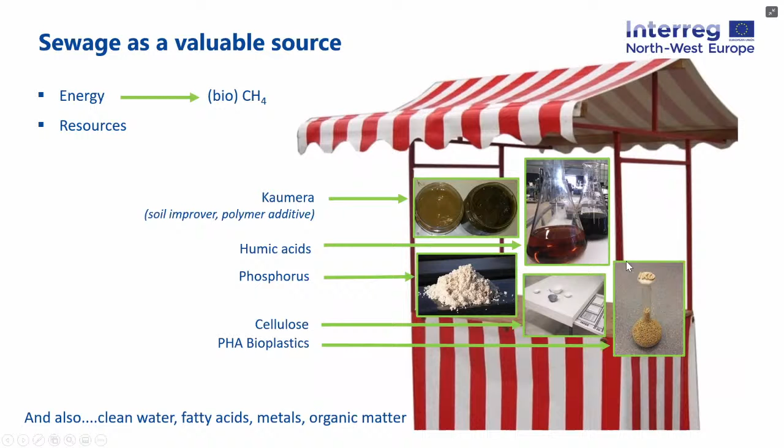Unfortunately, up to now, sewage is not fully utilized yet. I guess at this moment it's about less than 1% of the raw materials from sewage that is reused. And there are many different reasons for that.

First of all, I guess the potential is unknown by the markets. Secondly, it's also definitely still a challenge to extract all the raw materials in sewage. And thirdly, what we often see is that sewage has an image of dirty and unsafe, whereas we would like to see it as an opportunity.

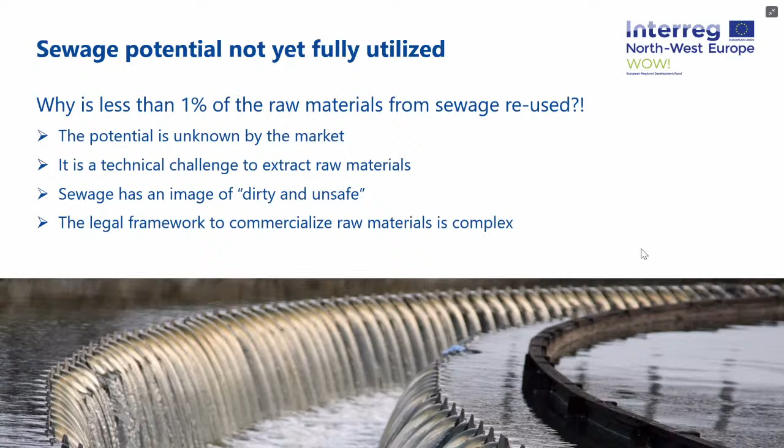And finally, something that also prevents us from reusing sewage to its full potential is the legal framework to commercialize raw materials, which is quite complex at the moment in the EU. So this is why we started the WOW project about 1.5 to 2 years ago.

And when you look at the WOW goals, we want to aim to start a transition towards a circular approach in sewage treatment. And for this purpose, we focus on 3 different things. First of all, we want to show that it's technically possible to recover raw materials from sewage water.

Secondly, we want to create a European framework for the steps that need to be followed from waste to raw material, so help out the legislation. And finally, we want to let market parties become acquainted with the potential of raw materials from sewage water, so it will get a boost.

Well, when we look at the end products that we would like to have at the end, which is in 2022, the first thing we aim for is 5 value chains from our bioproducts from sewage, and I'll tell you a bit more about that in a few minutes.

Secondly, we have 3 pilots for the production of 5 different types of raw material. Thirdly, a supporting tool to help water authorities in their choices towards a circular approach, and I will tell you more about that decision support tool in the last presentation of this seminar. And finally, a European legal roadmap.

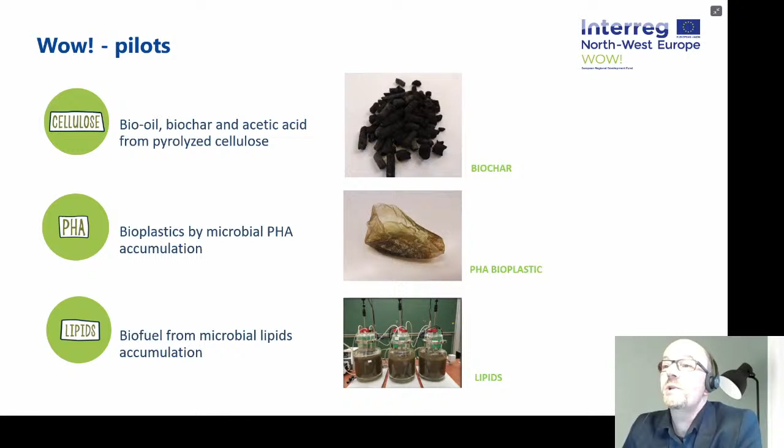To tell you a bit more about the three WOW pilots, the first one is cellulose, and we try to turn cellulose, which is toilet paper in sewage water, into bio-oil, biochar, and acetic acid via pyrolysis. The second is PHA, a bioplastic produced by microbial PHA accumulation, which the second presentation will go deeper into. Finally, we have lipids, from which we can produce biofuel via microbial lipid accumulation.

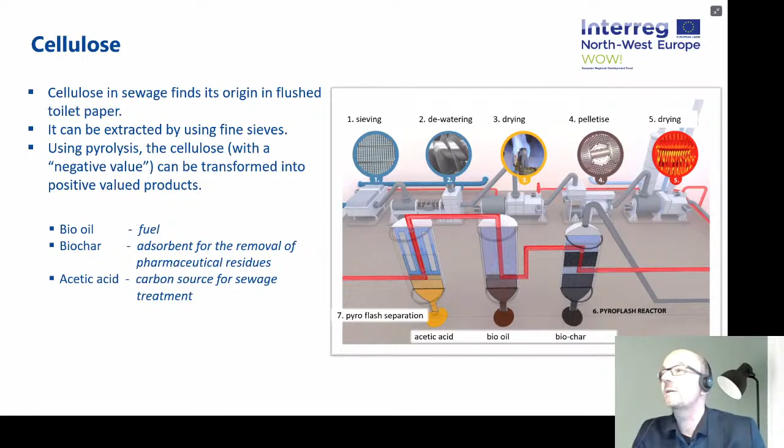Secondly, we have PHA, a type of bioplastic. It's the abbreviation of polyhydroxyalkanoates, a fully biodegradable plastic—actually the fastest degrading bioplastic you can find. Bacteria present in the secondary sludge of a sewage treatment plant can produce PHA, using volatile fatty acids already present in sewage. In WOW, we try to create proper conditions to enhance this PHA production, so more PHA is produced, allowing us to transform the VFAs present in sewage into positive valued products like PHA.

Finally, about lipids: bulking and foaming is a common problem in municipal sewage treatment plants, often caused by Microthrix parvicella, known to be responsible for this foaming and bulking. But you can also use this Microthrix to accumulate long chain fatty acids, also present in sewage as lipids, and these lipids can be harvested for biodiesel production. So we use the long chain fatty acids in sewage to transform them into a positive valued product, bio-oil.

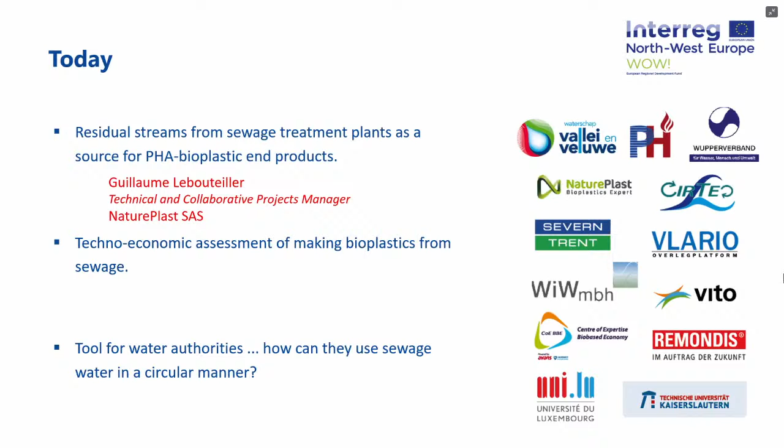Yeah, I hope everyone can hear me well. I'll try to share my screen now. Do you see me or not?

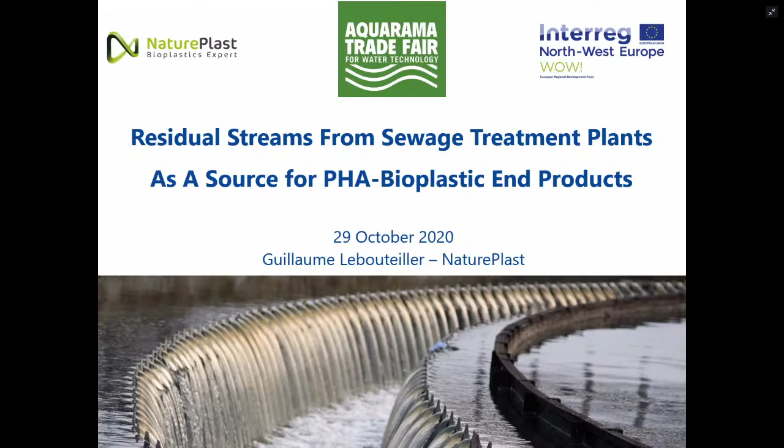Thank you, Jaap, for the introduction. My name is Guillaume Lebouteiller. I'm the technical manager of NaturePlast company. We are a French company located in Normandy, and we have been working for 13 years now on bioplastics materials. We are specialized in bioplastics research and development and compounding.

Today we will make a short presentation regarding the way to produce PHA bioplastics from sewage, which is what we are exploring within this very interesting project. First of all, I will present what are bioplastics and what are PHA.

Bioplastics is a whole family of polymers that can be bio-based and/or biodegradable. PHA are one material of the bioplastics family. PHA stands for polyhydroxyalkanoate, a polyester which can be obtained from two main monomers called 3HB for hydroxybutyrate and 3HV for hydroxyvalerate. One of the main products in the market right now is a copolymer called PHBV.

The proportion of each monomer determines the composition and properties of the material. It can be soft to rigid, very elastic, or very resistant to temperature. This is a very interesting bioplastic, especially because it is fully bio-based, obtained from renewable resources, and biodegradable in almost every condition. It's one of the only biodegradable polymers fully biodegradable in water, which is very important for some of the applications we are currently developing.

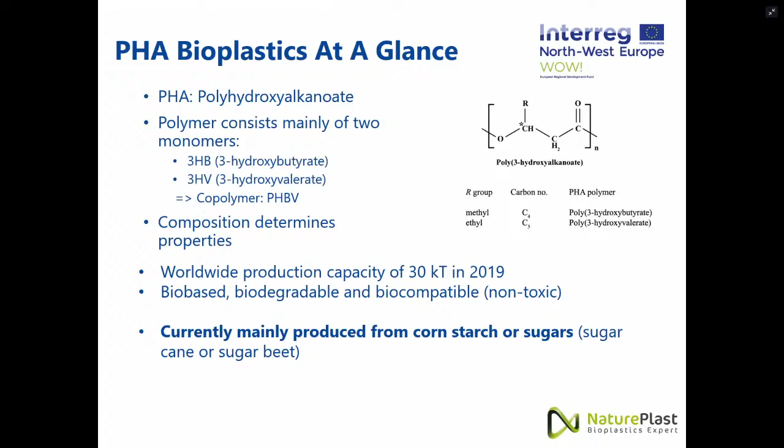Currently, PHA are mainly produced from standard biomass such as cornstarch or sugars obtained from sugarcane or sugar beet. The standard PHA production process uses volatile fatty acids (VFA), such as acetic or propionic acid, coming from sugars or starch, which are transformed by a mixed microbial culture (MMC) through a fermentation process, from which you obtain a mix of PHA and residual bacteria. Then you have to extract the PHA and purify it.

What we are trying to do in the WOW project, as already said by Jaap in his previous presentation, is to use sewage, for instance primary sludge, from which we can obtain VFAs through acidification. Then we obtain bacteria from activated sludge for biomass enrichment, and then do biomass PHA accumulation to get PHA-enriched biomass.

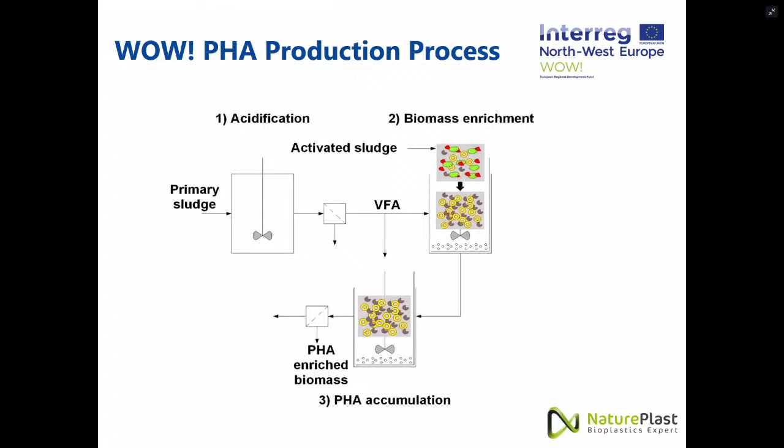Within the WOW project, we have a PHA pilot team with Kaiserslautern University and Wupperverband in Germany, working on pilot scale bacterial PHA production. The extraction and lab scale fermentation is performed by Avans. After obtaining the PHA, Natureplast, our company, does extrusion, injection, and characterization of the material to get the products. Vito, the last partner, performs the techno-economic analysis that you will see in the next presentation.

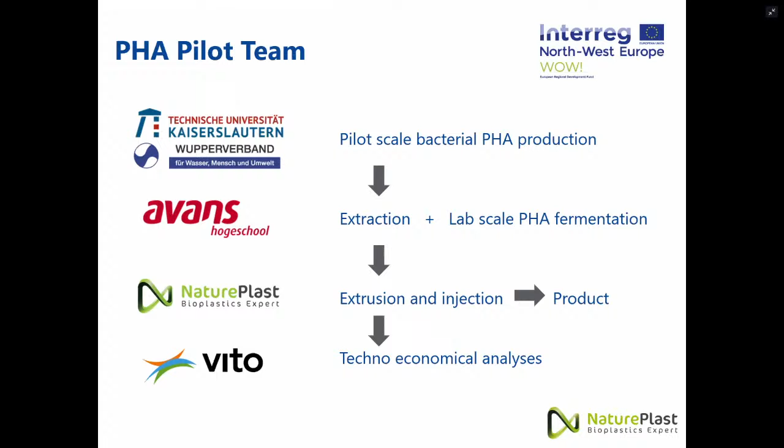Here are some examples of the pilot currently under development within this project. The first step at Kaiserslautern University is pilot scale PHA accumulation, with acidification reactors using primary sludge, which are then pressed to get the VFAs. The VFAs are then enriched, and the fermentation process occurs, allowing PHA to accumulate, which is then pressed and dried to get a PHA-enriched biomass.

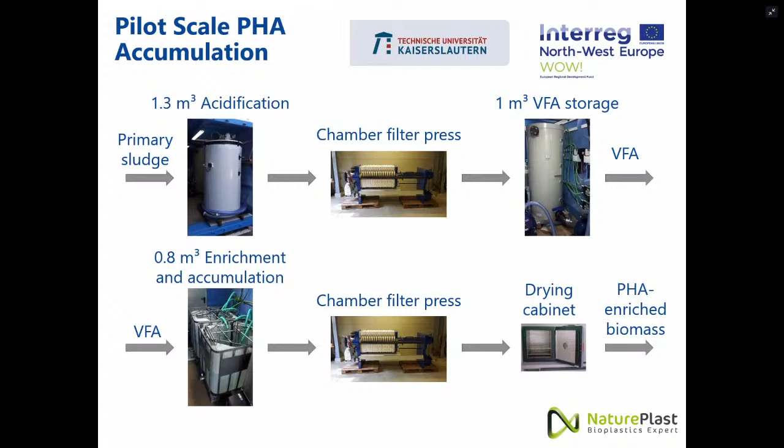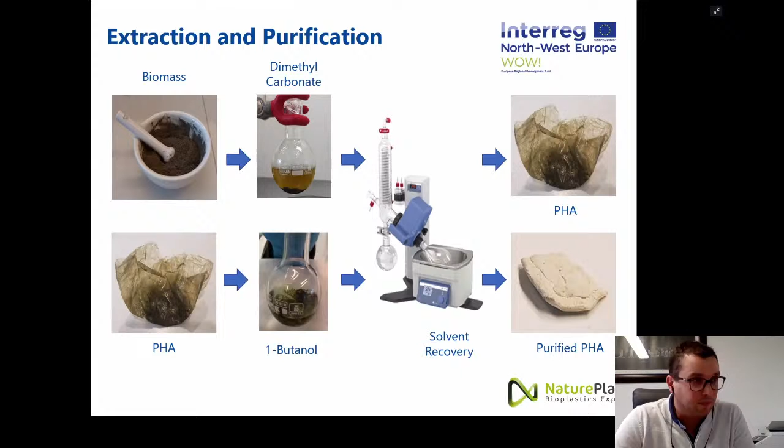All these steps are contained in this container, with all the equipment inside. Then you have the extraction and purification of the biomass, from which we extract the PHA with a solvent called dimethyl carbonate. You recover the solvent and get the PHA. The PHA is then purified with butanol; once again you recover the solvent and get purified PHA.

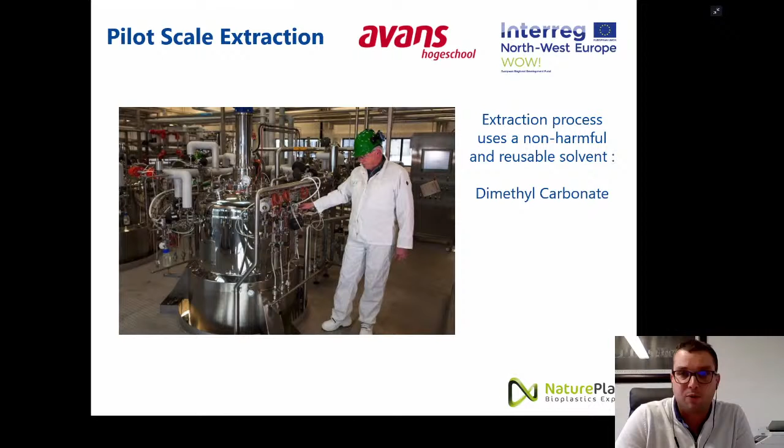Here you can see the kind of equipment used for the pilot scale extraction. What is very important and interesting in this process is the use of a non-harmful and reusable solvent called dimethyl carbonate. After this stage, once we get PHA, this is where we come in.

We use PHA through an extrusion process with 21mm twin screw extruders, standard equipment in the plastic industry, in order to get PHA compounds with improved properties. PHA obtained after fermentation, extraction, and purification is often very sensitive to thermal exposure, and it has to be compounded to improve its shelf life, its processability, and its properties in use.

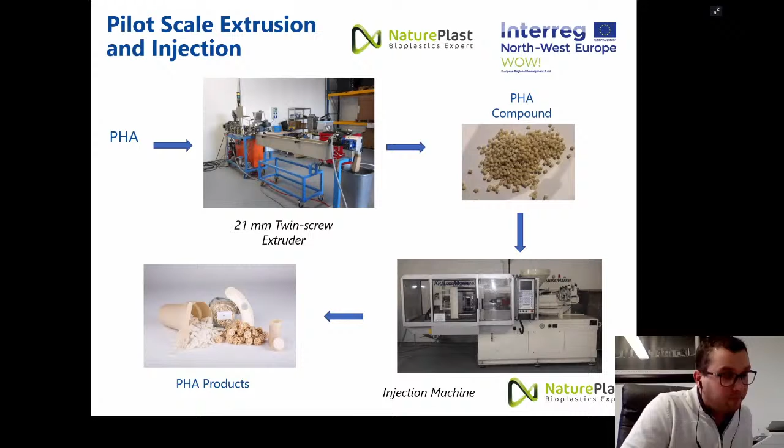Here we obtain a compound, a mix of PHA with additives and other biopolyesters, depending on what we want to obtain at the end, which are then injected in an injection machine, also standard plastic equipment, to get PHA products that you can see in this picture. So what can we do with PHA? This is where we want to go at the end of the project.

You can also make cosmetic packaging. It's a very interesting material because one of the functionalities used here is its ability to biodegrade really fast compared to most other biodegradable bioplastics. It's more and more used for applications where you are looking for degradation of the product after its use.

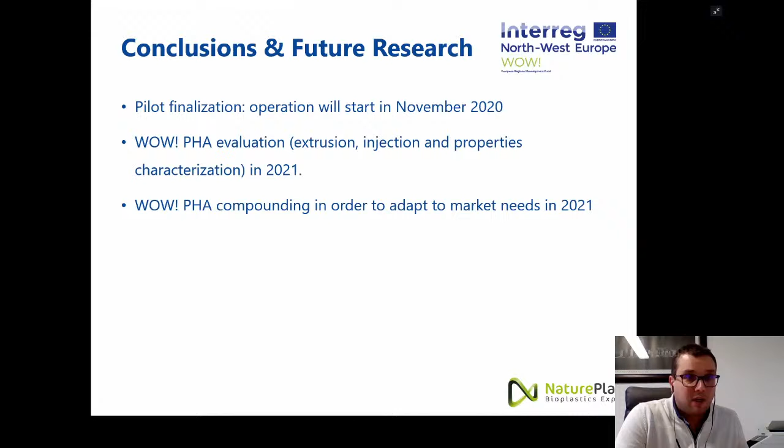We have created a small video about all three pilot installations. Let's have a look at it, and discover these three pilots.

Did you know that even used toilet paper can get a second life? Like this bench I'm sitting on.

Recently, the European Commission launched a new circular action plan to make Europe cleaner and more competitive. And although encouraging progress has been made, there's still a lot of work to be done to reduce our emissions and stop the ever-increasing amount of waste we are producing. Sewage is a largely untapped and endless resource for the circular economy.

In the WOW project, we embrace the circular use of raw materials from sewage. Our aim is to motivate sewage treatment plant operators and markets for bio-based products to meet each other. We are doing this by starting up three different pilot projects: one to recover and pyrolyze cellulose, one for lipids production, and one for making PHA bioplastics. We are currently at the sewage treatment plant in Ede, where our cellulose pilot is under construction.

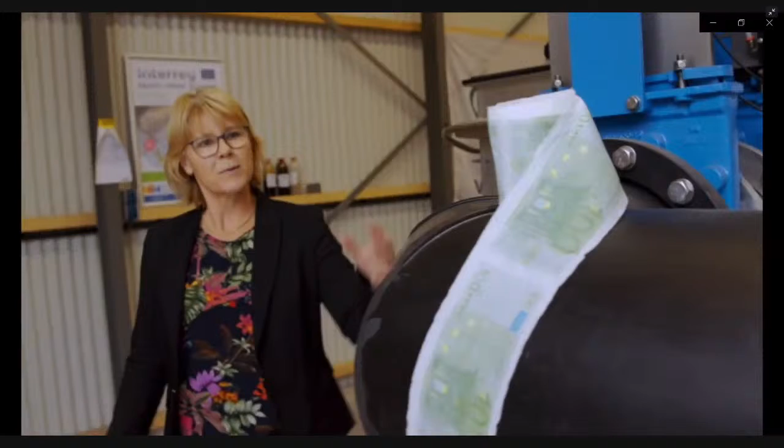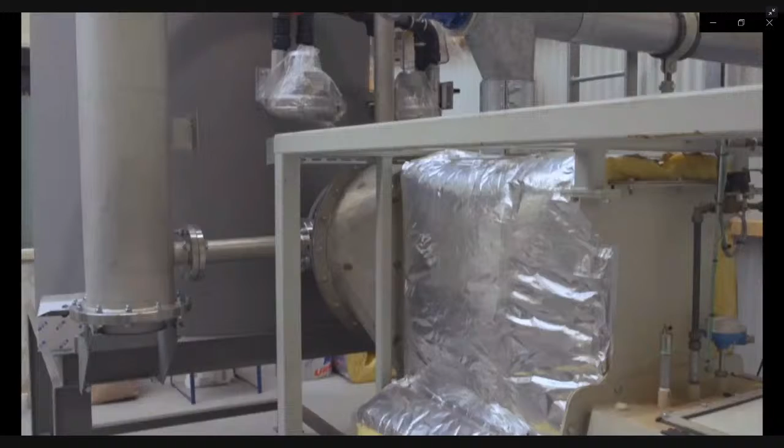In North-West Europe, each person flushes away about 13 kilograms of toilet paper per year. With fine sieves, we remove this toilet paper with cellulose in it. We dewater, we dry, and we press it into pellets. After that, we pyrolyze it. During this process, products like bio-oil and biochar are formed, and the biochar can be used to remove micropollutants from sewage.

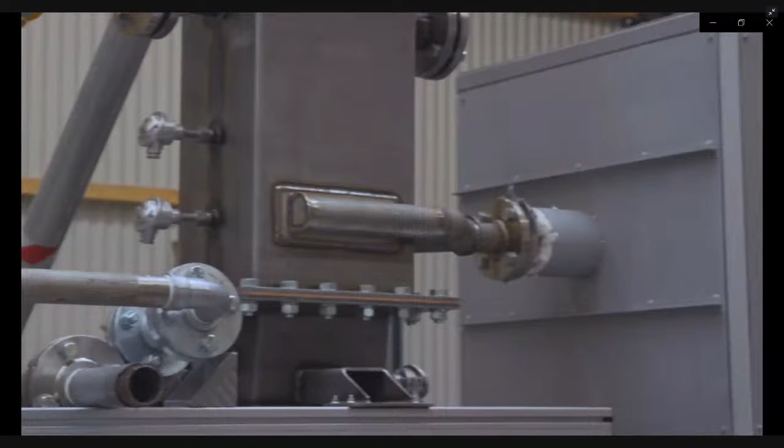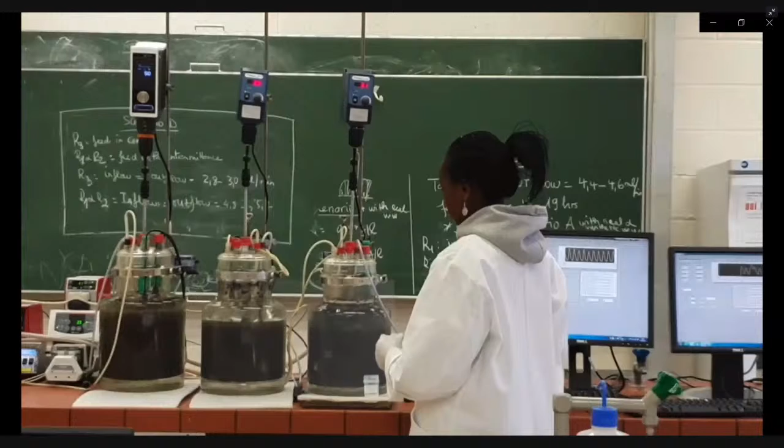Lipids are often seen as a problem in sewage treatment plants. In combination with certain bacteria, they can cause bulking and foaming. However, accumulating lipids can also be a great ingredient for biodiesel. Our project partner from Luxembourg calculated that lipids from sewage can cover a significant amount of the biodiesel market in North-West Europe.

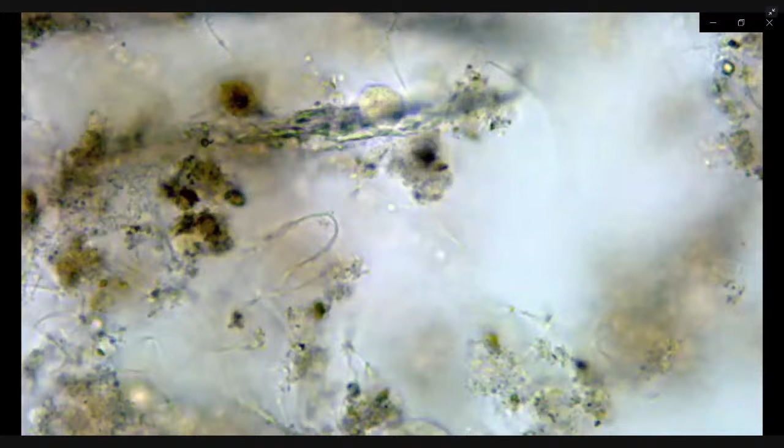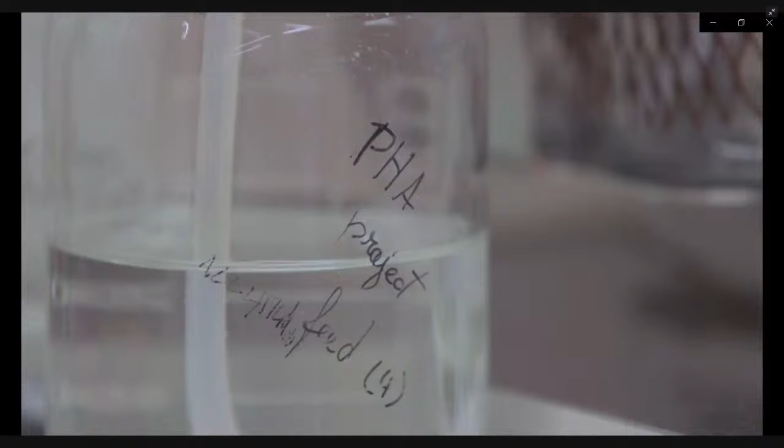Apart from the cellulose and lipids pilots, we also have the PHA bioplastic pilot. In this pilot, we work here in Breda along with our partners in Germany for the production and extraction of PHA bioplastic out of sludge or sewage water, and it works more or less like the human body. We aim to give bacteria volatile fatty acids, which is more or less like unhealthy food, and just like it makes us fat, for the bacteria it gives them PHA.

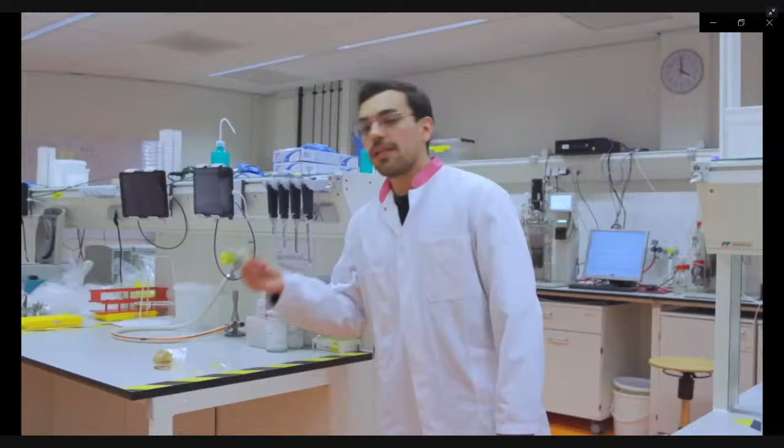After we make them fat, or make them accumulate this PHA intracellularly, we extract the PHA out of their cells, and then we can test for applications. With the extract, we can produce bioplastics like this one. Because they are fully biodegradable, they have the potential to substitute single-use plastics. Actually, PHA produced from sludge can already substitute 16% of all the PHA already produced worldwide. In our project, we show you the potential of raw materials from sewage. More companies are starting to get interested, and we hope so are you.

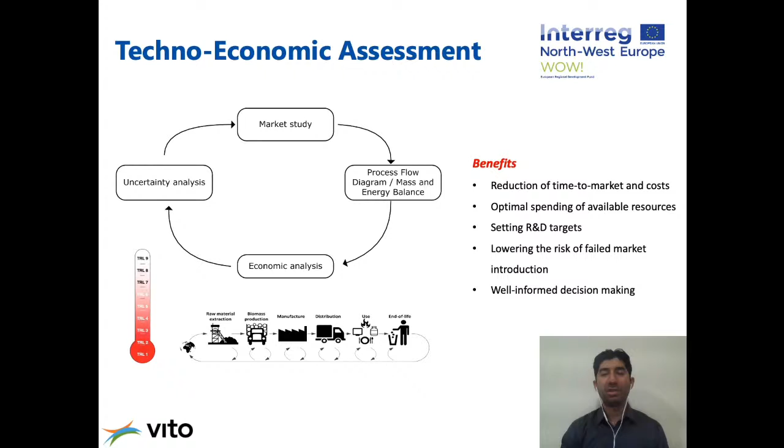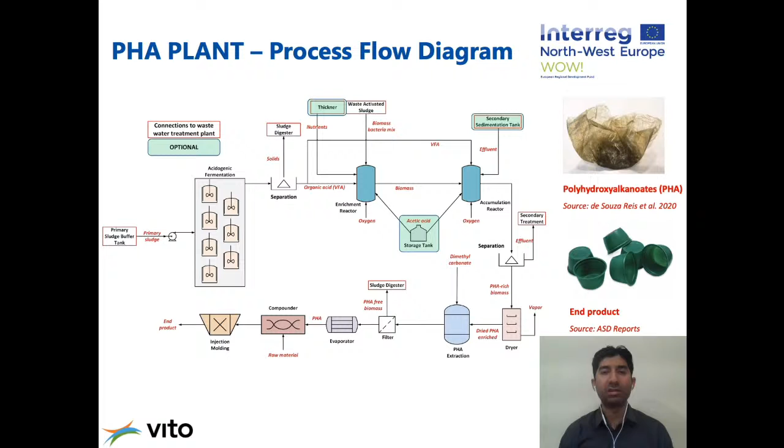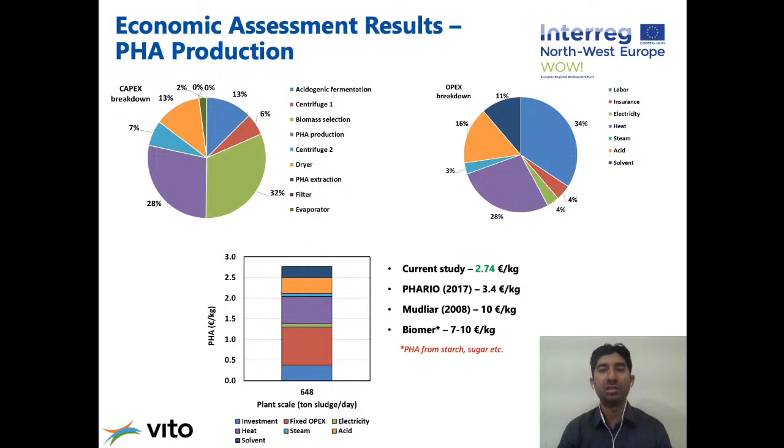The figure on the bottom shows the minimum selling production cost of the PHA. We estimated about 2.74 euros per kilogram, which is significantly lower than that reported in the literature. You can see that the major contribution comes from the fixed cost, followed by the heat required in the dryer. Here also you can see that the share of acetic acid is also quite significant. So if we avoid using acetic acid during the enrichment and accumulation stage, then the cost can be reduced further.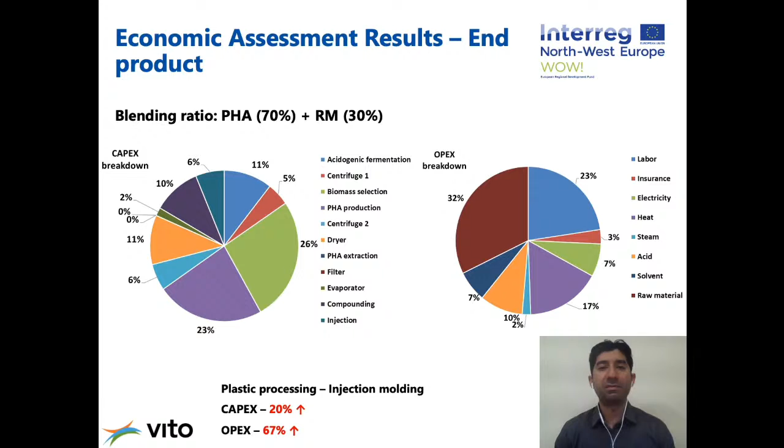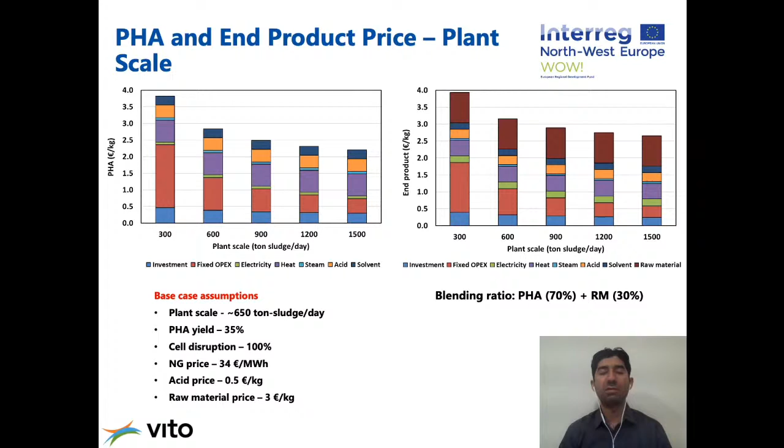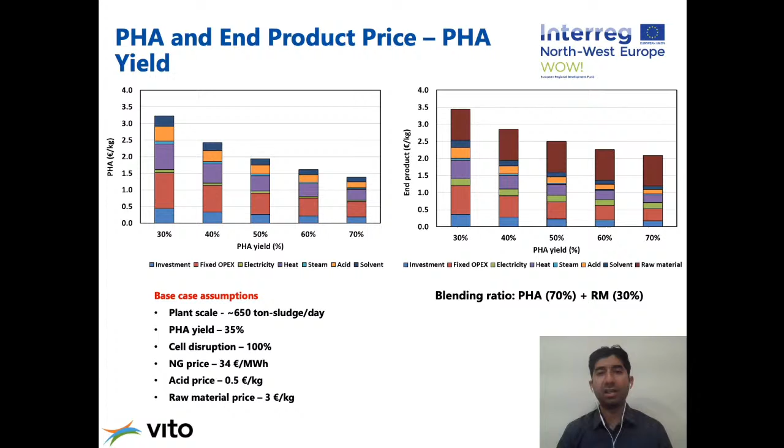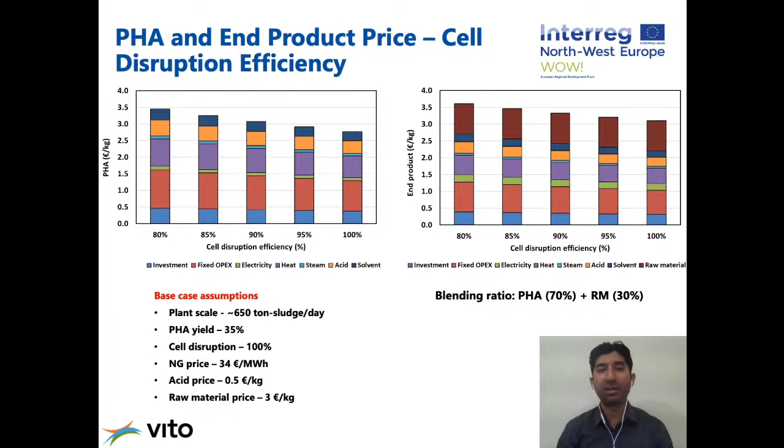These are the results with respect to cell disruption efficiency in extraction step. The base value assumed is 100%. However, in real practice, it may be lower than 100%. Since we see that the effect is not that significant, we can manage having efficiencies lower than 100%.

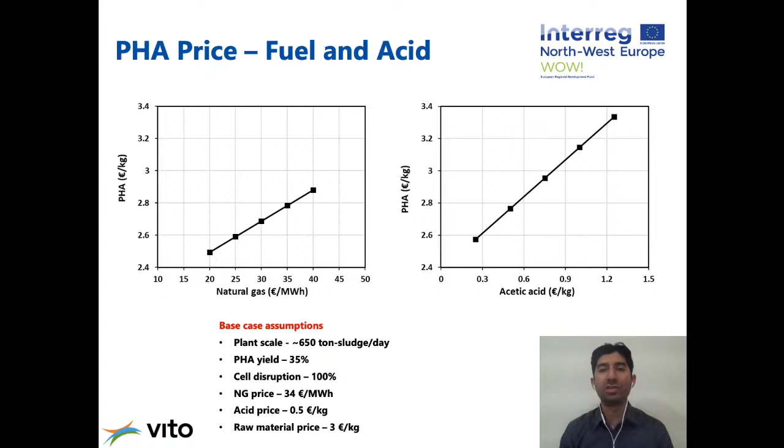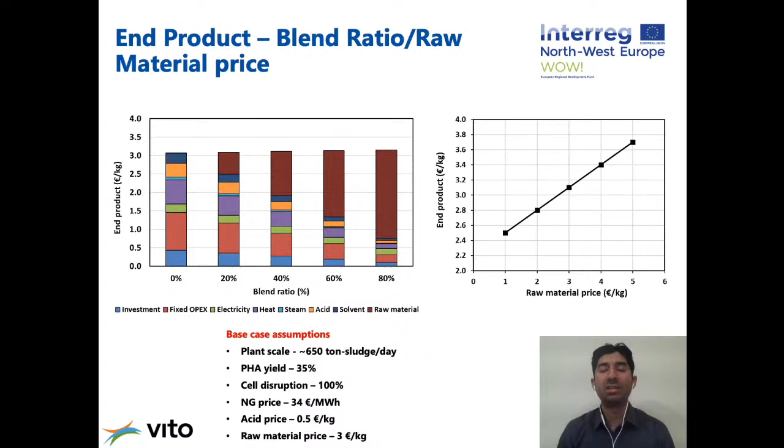These are the results of the end product price with respect to blending ratio. For the base case, the blending ratio was 70% PHA and 30% raw material. However, if we increase the percentage of raw material in the blend up to 80%, we can see that the major contribution comes from the cost of raw material itself. From the figure on the right, we can say that if cheaper raw material is used, the end product price can be reduced significantly.

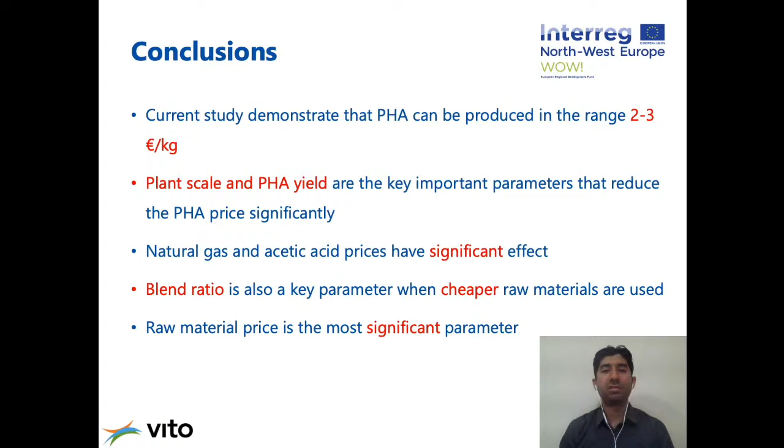We have also seen that the heat required during the drying process is quite significant, so if there is any alternate drying process with low energy consumption, the cost of production can go significantly down. And the PHA yield in accumulation stage is also a key parameter. If it can be increased from the base value of 35%, the production cost can be reduced quite significantly.

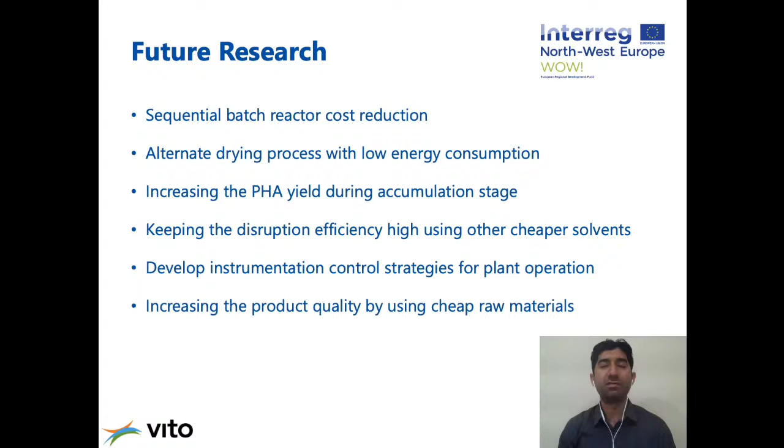The disruption efficiency should be maintained as high as possible by using cheaper solvents, and it is a critical area to be looked into. The most important thing is to develop efficient instrumentation control strategy for operating this type of plant. And finally, if a cheaper alternative raw material can be identified, which can be combined with PHA to produce a quality product, that would also reduce the cost of the end product significantly.

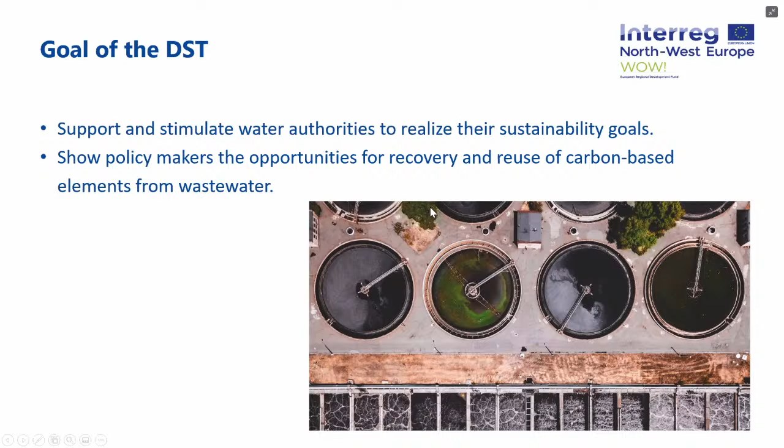Well, what is the DST? The DST is an Excel tool, which I'll show you in a few minutes, for water authorities that operate sewage treatment plants. The DST can be used to get a first impression if the influent of a sewage treatment plant is suitable for the recovery and reuse of carbon-based elements. So it only gives a first impression. The DST looks at the 3 different activities that WOW is focusing on: recovery of cellulose, PHA bioplastic, and lipid production.

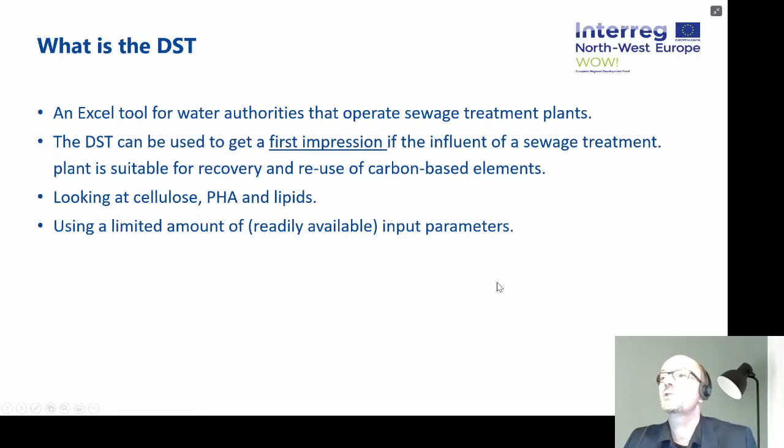What is also important is we try to use a limited amount of input parameters, which are usually readily available for sewage treatment plant owners. So you don't have to get a lot of data to use the decision support tool. Based on the outcome of the DST, you can decide if the technology for either cellulose, PHA, or lipids is worth a closer look. As I already said, it gives you a first impression, and if it gives a positive outcome, you could do a further study to see if it is a really feasible technique.

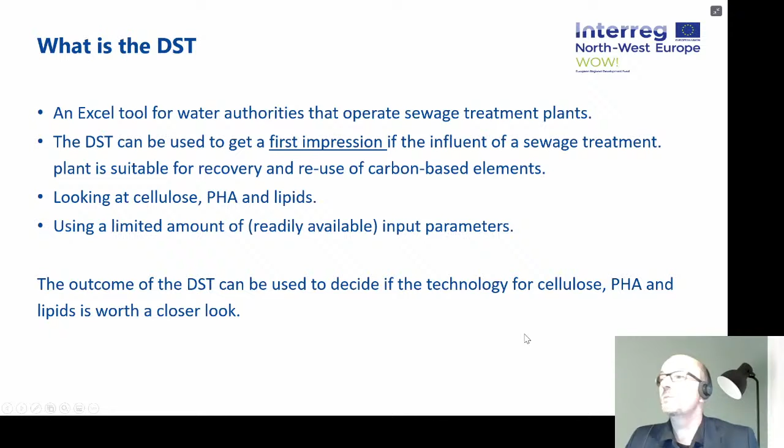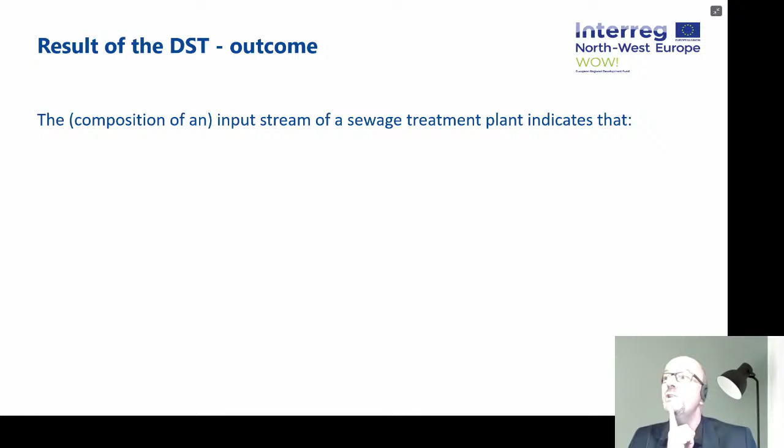Well, when you look at the outcome, we have 3 different outcomes. The composition of an input stream, so the information you put in for a sewage treatment plant, can either indicate that implementation of the technique for cellulose, PHA, and/or lipids is very promising. That would mean you would like to take a further look to see if it's economically feasible and if you have enough square meters available to put the installation and stuff like that.

The second outcome is, of course, that implementation of either of these techniques is not feasible, so it's not worth taking a further look. And the final one is that it's not clear yet if the implementation is feasible and a more detailed consideration is needed. This is when you put in numbers which are close to the ranges that we have used within the decision support tool, meaning you have to take a closer look.

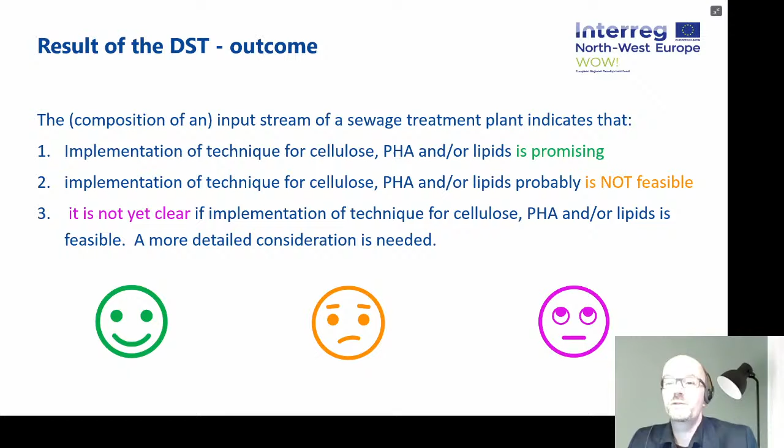Well, when we look at the results of the DST, it provides you information, first of all, of the effects of the WOW technologies on other sewage treatment plant processes. I can imagine that some sewage treatment plants already produce biogas, for instance, or already have struvite recovery, phosphorus recovery. Then you would like to know if implementing, for instance, PHA production would affect one of these processes. Well, the DST gives you more information on that.

Secondly, it gives you information about the technical aspects, which is based on the pilots that are currently running within the project. Also information about the economic aspects, and this information comes from the Techno-Economic Assessment, which Mohammed just told you more about.

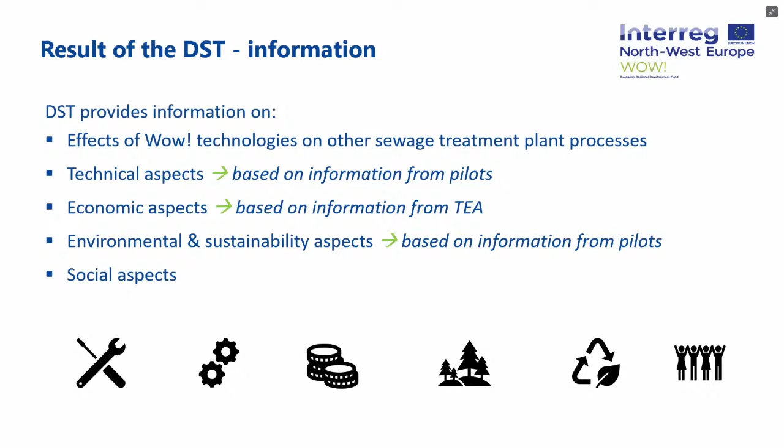Thirdly, it gives you information about the environmental and sustainability aspects, based also on the information from the pilots. So does it have an effect on the environment? Is it positive, for instance, for the carbon footprint? So that kind of information. And finally, it gives you information about social aspects, so is it, for instance, giving a lot of smell or a lot of noise, visual pollution? That's also mentioned within the DST.

Well, what does it look like? So now I would like to take you to the concept DST, what it looks like. So I will end this presentation and share with you my screen with the DST.

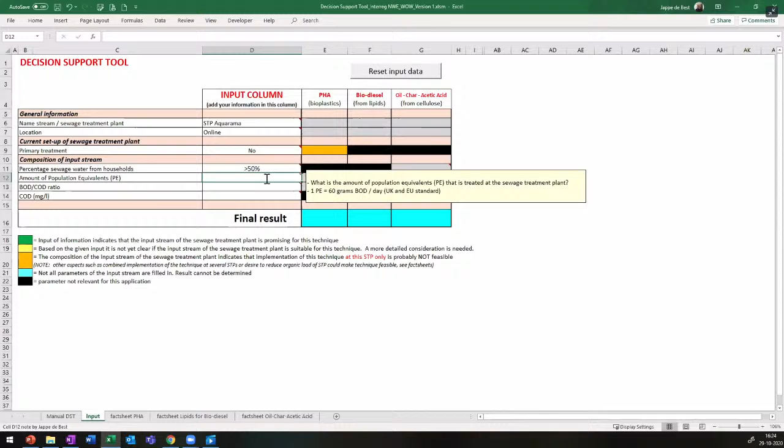Well, the other questions that you need to fill in is the percentage of sewage water from households, the amount of population equivalents, the BOD-COD ratio, and finally the COD. So for now, I'm going to put in some numbers to show you what happens randomly. Finally, COD, I will take 300.

So here you will see that the different colors change within the decision support tool. So for each of the parameters that you need to fill in for each of the three recoveries that we look at in WOW, it will give you an outcome, and it will give you in the color, and the colors are explained over here, which match the ones that I also showed in the presentation. It will tell you whether it's feasible, yes or no. And if you want to know why it is feasible, yes or no, again, when you go to the triangle, it gives you an explanation which ranges we have chosen for a positive or a negative outcome of the decision support tool.

So then you have the final results. And of course, I've chosen numbers to see the three different ones. So green, in this case, the cellulose recovery would be feasible with this input stream. The biodiesel would not be feasible. And for PHA, more information is needed. So this is the first outcome, and then we have three tabs left.

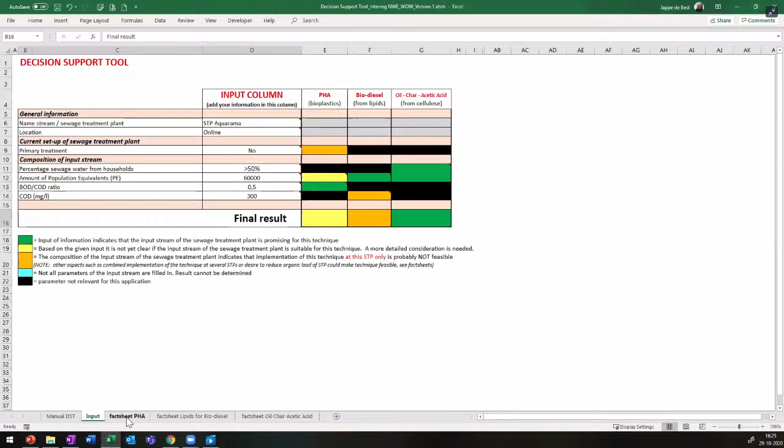So for each of the different techniques, we have a fact sheet, which gives you more information about the technology. So I'll briefly explain this to you. First of all, on the left top corner, you see the possibilities of implementation. So it gives you the information on the top we see previously, but now it gives you also an explanation of the color, so that gives you a bit more information.

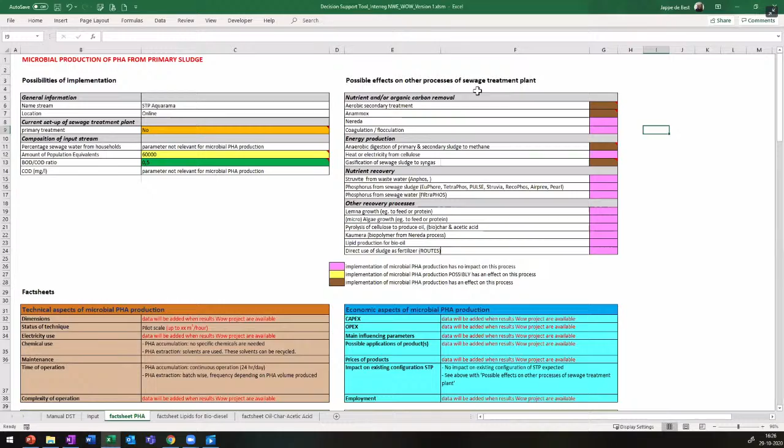Here on the right top side, what you can see is what I already told you, the possible effects on other processes at sewage treatment plants. So you could have an aerobic secondary treatment, you could have an Anammox or a Nereda. It could have an effect on coagulation or flocculation of your sludge. And here you also see other processes, so for energy, nutrient recovery, or other recovery processes. And you have three different options. So the pink one says it has no impact on the process, so in this case, PHA production has no impact on struvite recovery. The yellow one, it possibly has an effect.

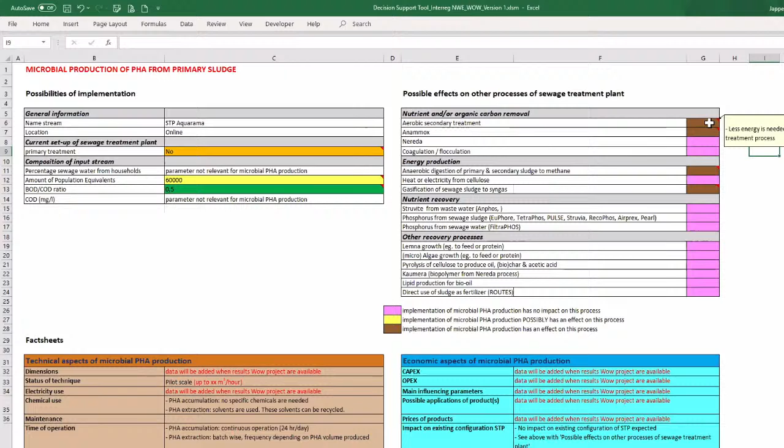And the brown one says it does have an effect. Again, when you go to the triangle, it gives you more information about the specifics of the effect, so if it's positive or negative. And of course, you can take that into consideration.

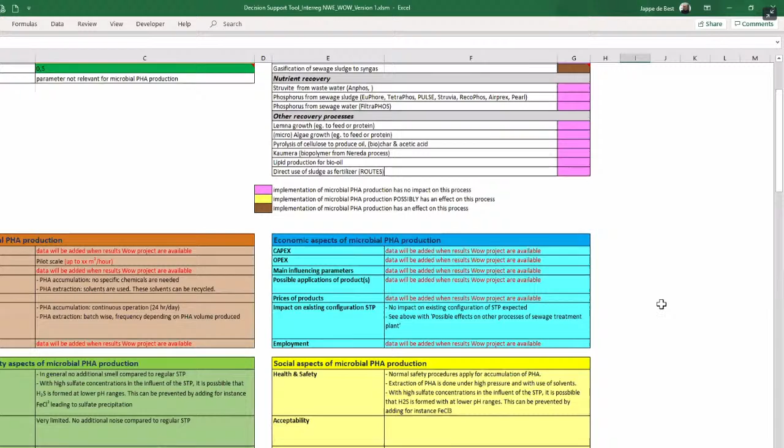And then finally, you also have the fact sheet, which gives you more information about the technical aspects of, in this case, PHA production. So the dimensions of the pilot, the status of the technique, electricity use, and other parameters. It gives you information about environmental and sustainability aspects, as I already told you, odor, noise, visual aspects. You have the economic aspects, so CAPEX, OPEX, main influencing parameters, and you have the social aspects, so health and safety, acceptability, and legal aspects.

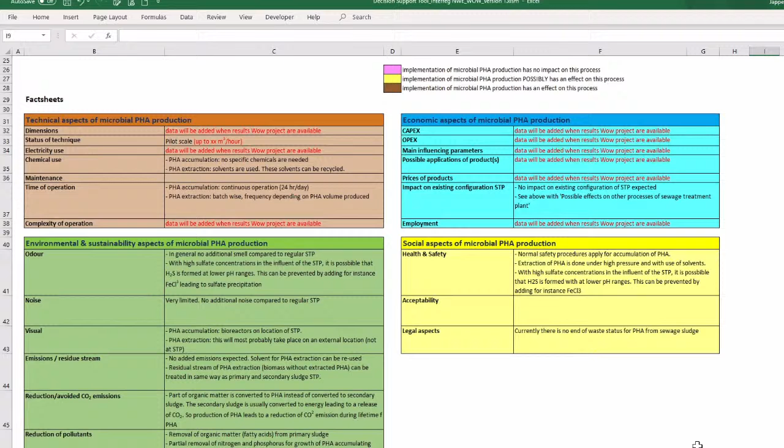As you can see, not all information is filled in yet because the pilots currently are still running, but I will show you one for cellulose, which for instance already has the economic aspects filled in. So we hope to fill in all this data during our project and in the end have a complete filled fact sheet for all of the different techniques that we use.

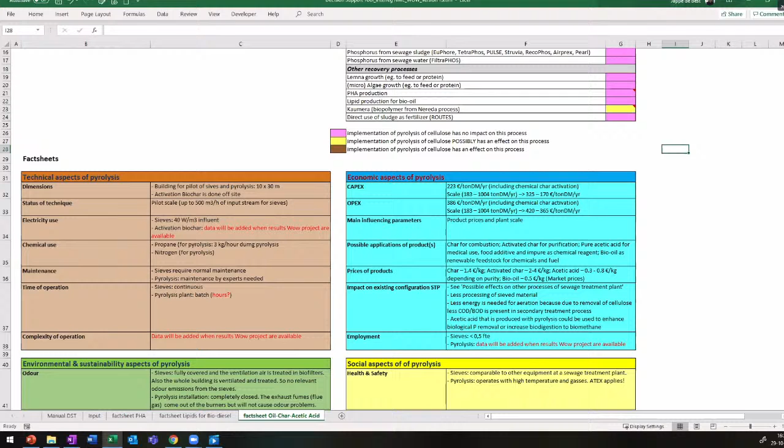Well, that ends for me the presentation about the DST. I'll quickly go back to my presentation to see if I have left anything out. The next slide would be if there are any questions left about the DST. So if there are any, please ask them.

Yes, there is a question. Is biodegradable plastic safe enough to use in the food industry or food packaging, for example?

Good question. That also has a relation with the legal aspects that we are currently looking into. So that is something that still needs to be tested, whether it could be applied, but currently not, because indeed you have certain regulations about food applications of plastics which are made from a residual material. So that's something we are still looking into, but I guess in the end it could be an option.

Okay, thank you. And another question, what are the changes in PHA as it degrades in soil and water? The effect of the degradation of the PHA, you mean? Yeah, so the PHA when it ends up in the environment in the end. Is that the question? Because I'm not...